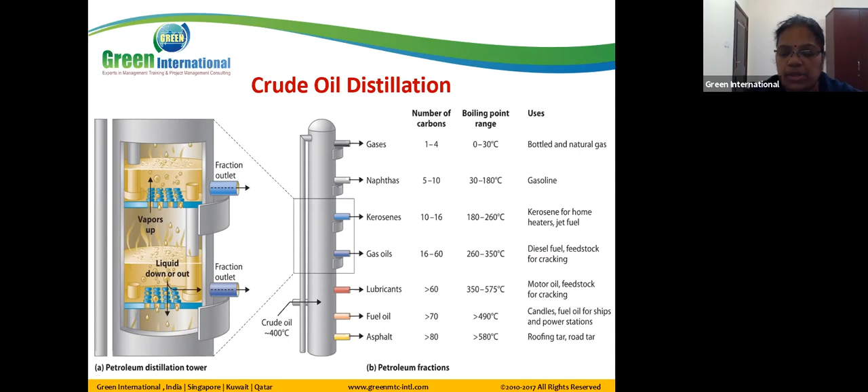We generally have a plate here, and it depends upon the crude oil, generally 400 degrees. The lighter one should be on top, then slowly the heavier one will be in the bottom. This is called - heavier one gases, normally until the 30 degree boiling point, until C4 it will be there. Naphthas, kerosene, gas oil, lubricant, fuel oil, and asphalt.

So just to show some picture - I don't know whether you all have got this material, I don't know whether you got it or not. Yes, we have received it.

Yeah, the total flow, I mean flow diagram for distillation. First you have atmospheric distillation with the crude oil. Then the heavier, that's called the lower end product, again they go with vacuum distillation here. Let me zoom - I don't know, I cannot see here.

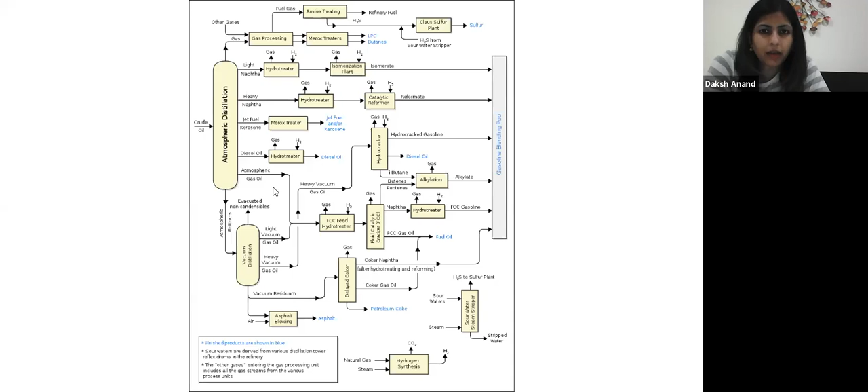Is this given separately, ma'am? That's what I'm not really sure whether you have got it or not. Can you check later and let me know, then I will send it to you all.

Okay, so there are two types of distillation generally, because the first slide I showed you is the overall process flow, but this is in detail - even this is also not much covered, I would say. Atmospheric distillation, then we say the bottom, then go to vacuum distillation. From the vacuum distillation only you will get the asphalt, and then you have a residuum first of all. That vacuum residuum - here it is atmospheric bottom or atmospheric residuum.

Then you have multiple processes - you can have a hydrotreater. What does this hydrotreater mean? Then catalytic reformer - I think we will talk about catalytic reformer later on, that will convert from a low octane number to a high octane number, that's called reformate. And then removing sulfur, that's called a sweetening process, we will talk about that when you review the question and answer.

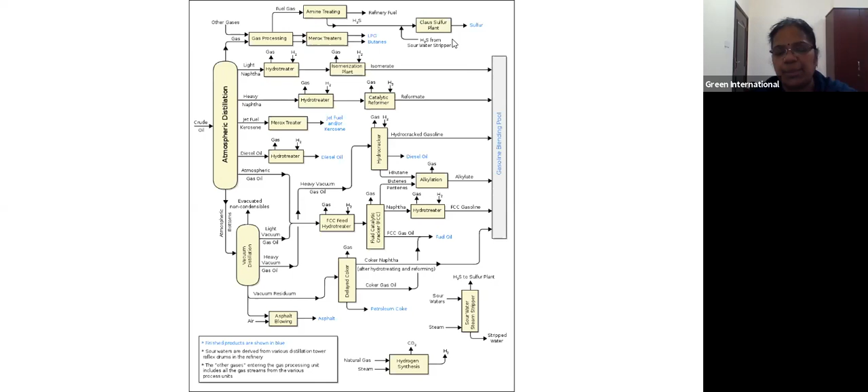We'll talk about it - I have a lot of questions in distillation. Very rarely you will get a problematic question, even that is related to mass balance, and some you may have boil-up ratio calculations and all. Most likely you will get a theoretical question in refineries, I mean in distillation. So this picture just gives you the overall idea of what the processes are.

So now let's go back to our slide.

So generally you have a distillation tower, whether it is atmospheric or vacuum distillation. Normally you have a feed. Then on the upper portion, it's called a rectification section, and the bottom one is a stripping section.

Anybody working in the refineries? Abhijit, Anthony, Vioran? I have worked in the gas plant. Yeah, I worked in refineries initially. So you might have known better than me then. So if you have any more material, maybe please share it with others, maybe that will help them.

Okay, so this is what rectification and stripping means. Then you have a condenser, whatever contents will be collected in a reflux drum. Then the reflux again will be fed back to the distillation, and the distillate, generally called a gas form, will exit. In the stripping section you have a reboiler, and whatever the boil-up is, it will go up. The liquid will be fed from the top to the stripping section. Then from the boil-up we'll have a vapor again. This is called the bottom product.

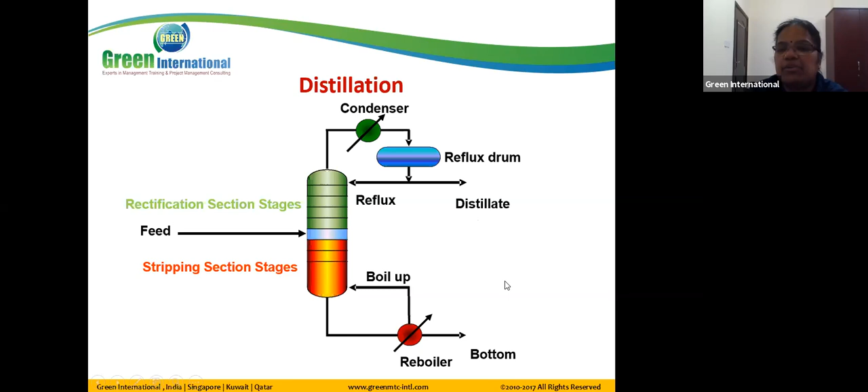So in the rectification section, overhead, that is V, which is nothing but L plus D, whatever is coming here. So again you take a balance in the rectification section alone, then you get XV in the V-bar, that is equal to XL in the liquid plus XD in the distillate.

So reflux ratio, R, is nothing but L by D. L by D is called the reflux ratio. So if you divide by D, V-bar by D equals L by D, and here it is XD only, so L by D becomes the reflux ratio. So the same XV you can write in reflux ratio form.

So if you can remember, if they give you the mole concentration in vapor in a rectification section, then you know this formula, you can use it. If you know the mole fraction of liquid and mole fraction of distillate, you can use this reflux ratio formula to calculate the V-bar. From V-bar, you can even calculate the boil up also.

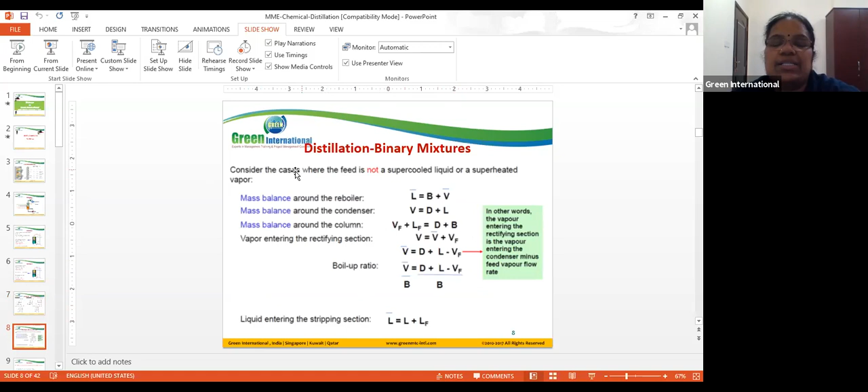So when you substitute those things, consider the cases where the feed is not super cooled or superheated. Then you can get the balance around the reboiler, around the condenser, and around the column. If you have 3 mass balances, then you can find the vapor entering the rectification section, then substitute that value.

You will get the boil up ratio, which is nothing but D, the distillate mole, plus the liquid that's in the condenser section, right? Boil up here, boil up means in the bottom.

Here the L, D, which is the liquid coming to the stripping section, minus your VF. VF is nothing but, whatever vapor is coming from the feed, some percentage is getting vaporized, that is called VF. So the same way, if you know D, L and VF, you can calculate the boil up ratio.

So this is another thing, you don't need to remember everything. Just remember this boil-up ratio, there is a formula V by B, boil-up ratio V by B. Also you can calculate, if it is not a super cooled or superheated liquid, from this formula.

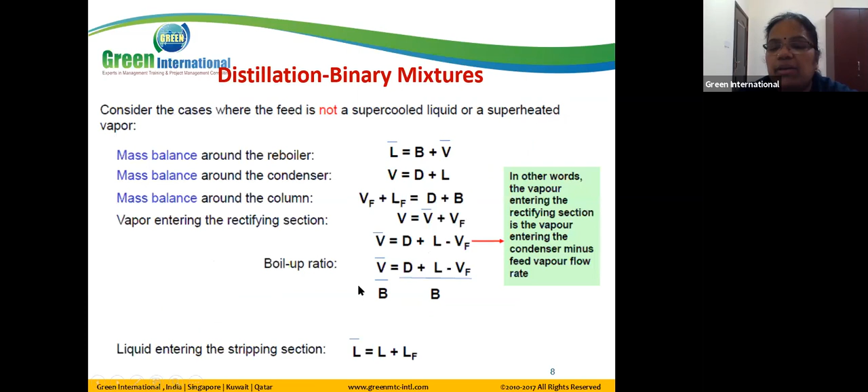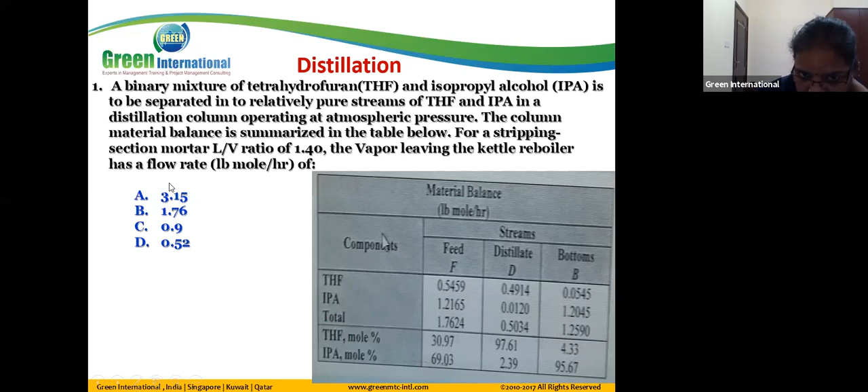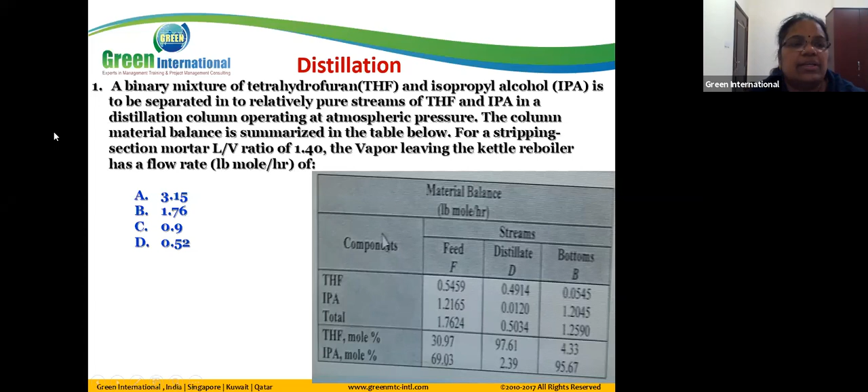They have summarized, for the stripping section, the L by V ratio given. They are asking you to calculate the vapor leaving the kettle, the flow rate in lb mole per hour. Let's go back to the chart. If you remember this chart, it is here, right? This is the stripping section.

They have given the L by V ratio, not the boil up. What is the question? It's the vapor leaving the reboiler, meaning V bar is what they've asked, V bar, V. The L by V is given, the V being the vapor leaving the reboiler.

Okay, so now let's see what information is given. They have given the feed and the distillate and the bottom. Total flow rate is in LB mole per hour, which is also the question. LB mole per hour is given, mole percentage is also given. How to calculate L by V? It is given.

L by V ratio is given as 1.4. Then L is nothing but 1.4 into V. Right? Any idea?

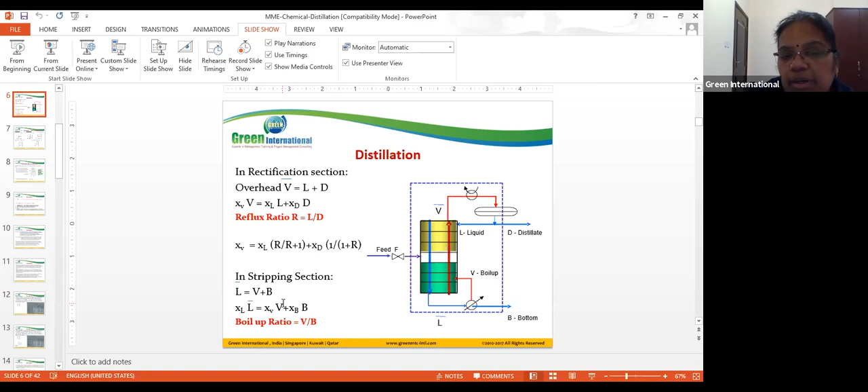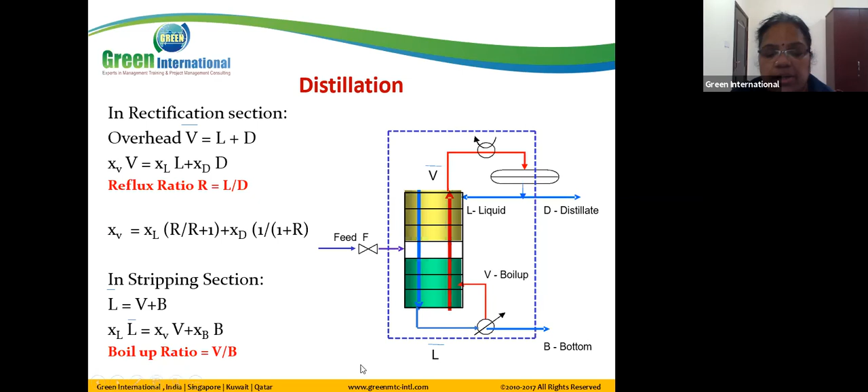V by B, we can take it as, where it is, the boil-up ratio you have to calculate. L bar equals V plus B. Then if you substitute here, I think you will get it. So if you divide it by B everywhere, you will get it. Let's see how it is being solved.

Answer is A, okay, they have given. So this is the mass balance. At bubble point, L bar equals F plus L. That we saw, V equals V bar. So at L equal to 0, why is it L equal to 0? They have only taken into consideration ammonia only, right? So to recover the majority of ammonia, that's why they take it as L equal to 0. Then it is XF in the feed.

So F by B, V by B plus XB here. Then for ammonia, what is the balance? For water, what is the balance? Then they have solved that. They take it as V by B equals 0.71. So here you substitute one into another equation. So here, what is F by B? That is 0.95 V by B plus 0.01, right? You substitute that in any one of the equations, then you will get the value.

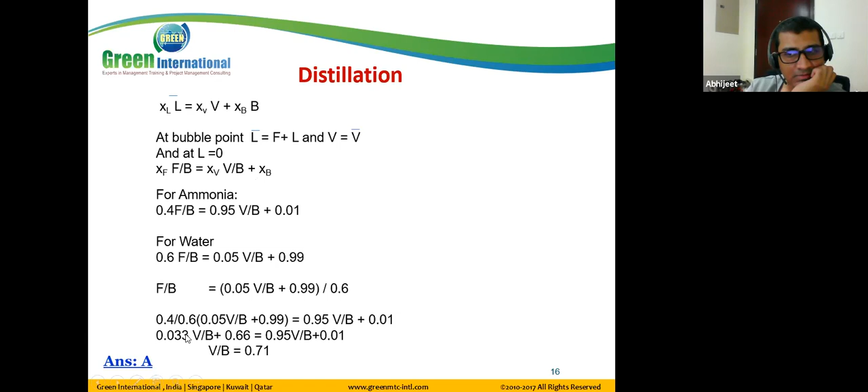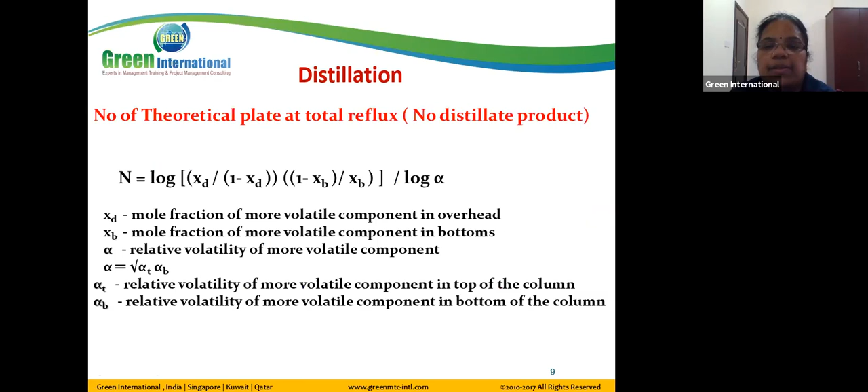Why is L is 0? I didn't understand. See here, yeah, they are talking about substituting L bar equals F plus L. That means if you see here, bubble point, you have considered L is already there. This is only in the stripping section, and already we consider F plus L, that's L bar. So that's what here we have talked about, L bar, which is already in the feed actually. That's the point of bubble point we talk about.

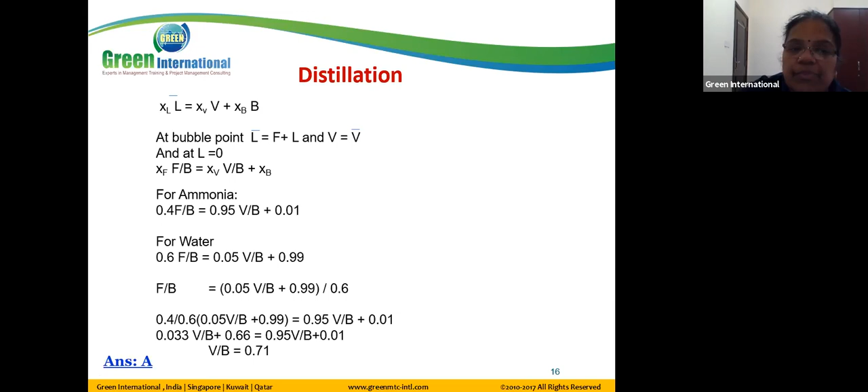So in the bubble point, L bar equals F plus L, and V equals V bar. You substitute here, and L equal to 0 means that is nothing but your pure liquid you are considering, that's everything in feed plus vapor. So substituting that bubble point condition in your mass balance, you arrive at your boil-up ratio.

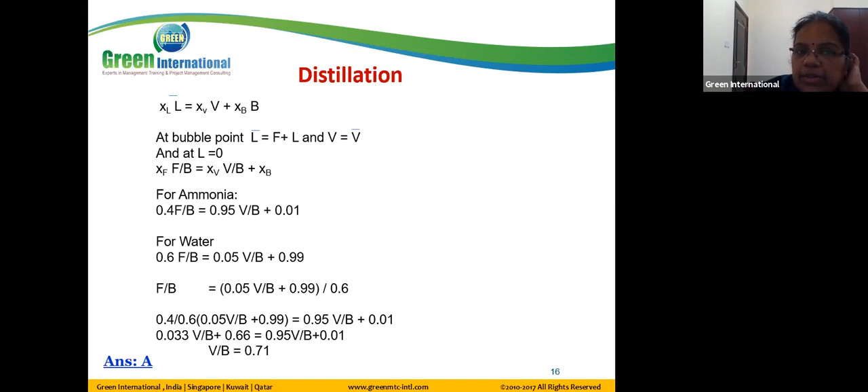So next question, this is all we talk about. From now onwards it's going to be more theoretical. Bottom product of atmospheric pressure crude oil distillation column is termed as Asphalt or Reduced crude. Reduced crude is the right answer. Asphalt will be the bottom product in vacuum distillation. First you have atmospheric distillation, then vacuum distillation. So asphalt will be the bottom product of vacuum distillation. Here they're talking about atmospheric distillation, so it's called reduced crude.

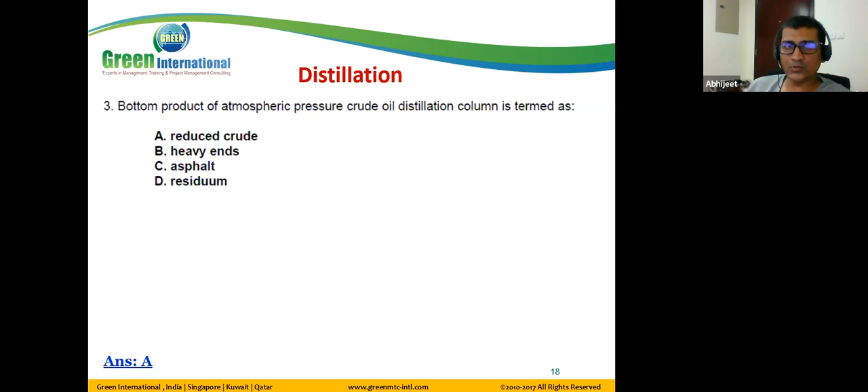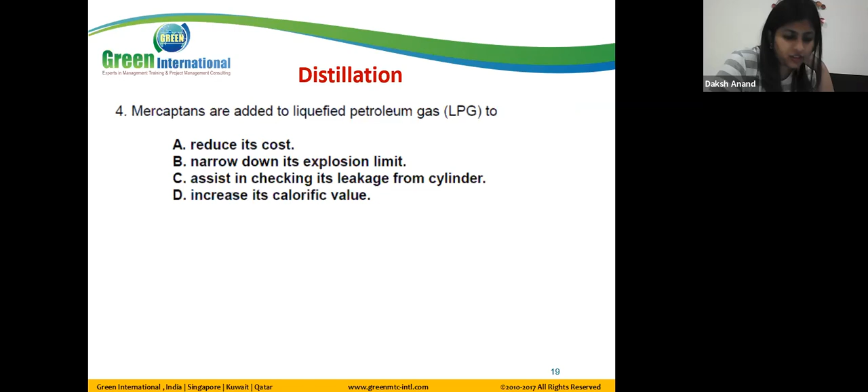Mercaptans are added to LPG - this is a very common question also being asked. Why are we adding mercaptans? To check the leak - assist in checking the leak. Very simple.

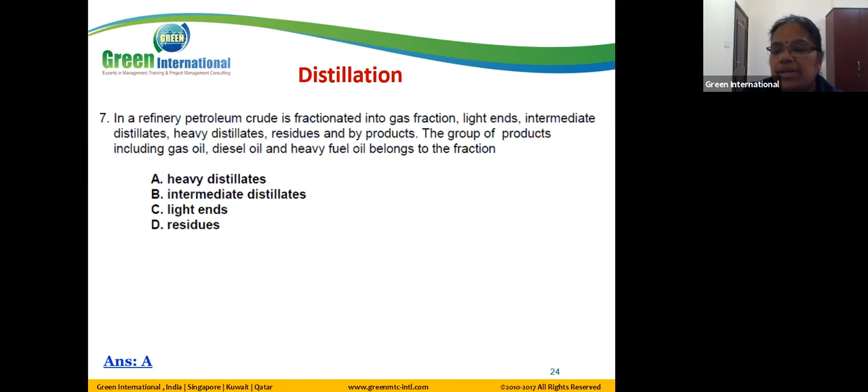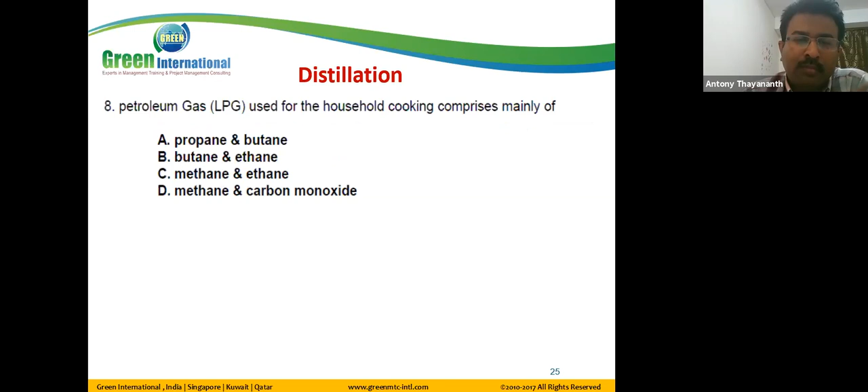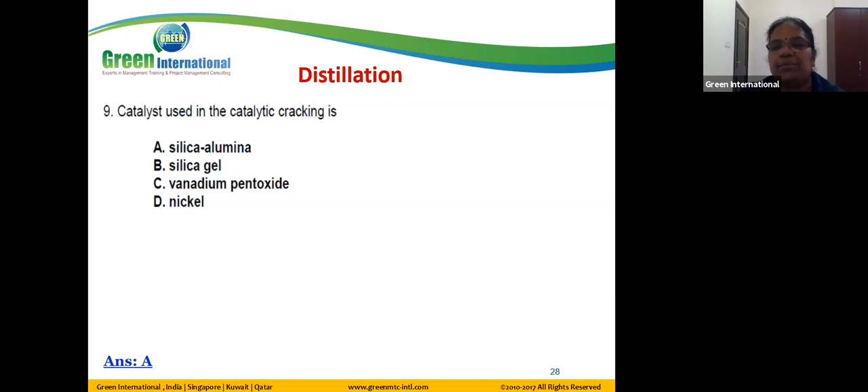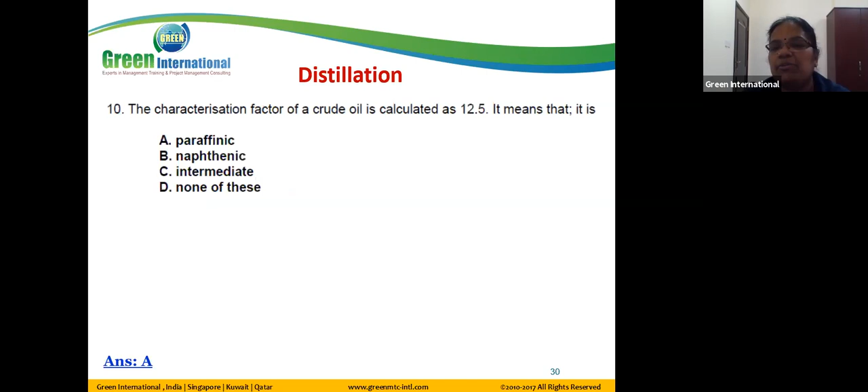The characterization factor of a crude oil is calculated as 12.5. It means that it is paraffinic. Very common question - they'll give us some K factor, then what is the characteristic of that crude oil?

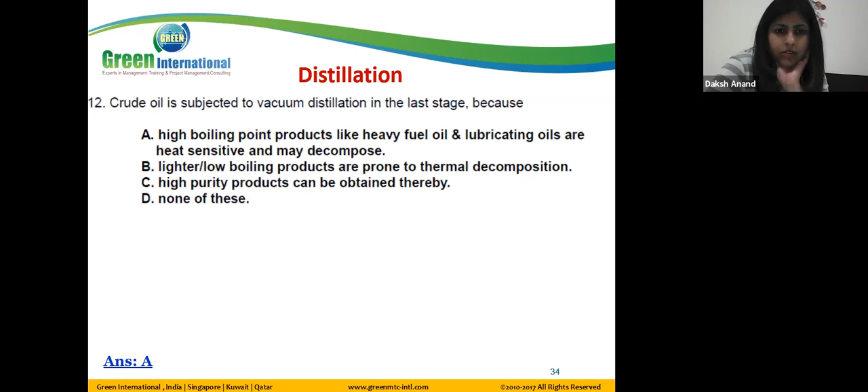Crude oil is subjected to vacuum distillation in the last stage because... why is there vacuum distillation? None of the above - none of this, none of the above. Is it true? High boiling points. High boiling point - heavy fuel oil, lubricating oil, they are heat sensitive, they may decompose at atmospheric pressure. That's why we use vacuum distillation to distill it further. Decrease the boiling - that is the reason why there is vacuum distillation we use, because we want to distillate the further heavier hydrocarbons. That is why.

Which of the following has the highest octane number? Aromatics - this is also very common.

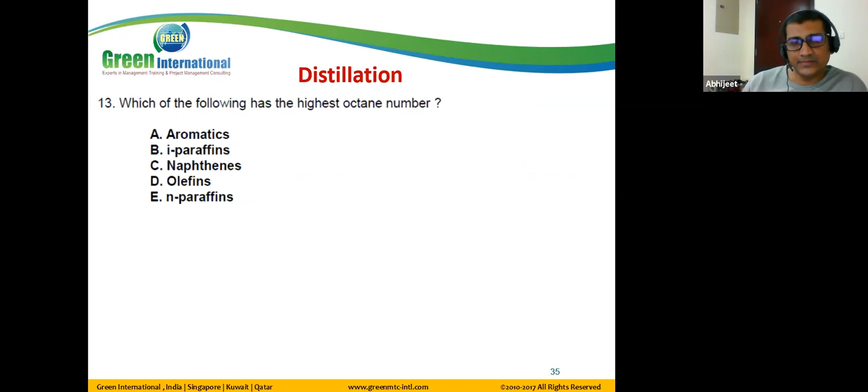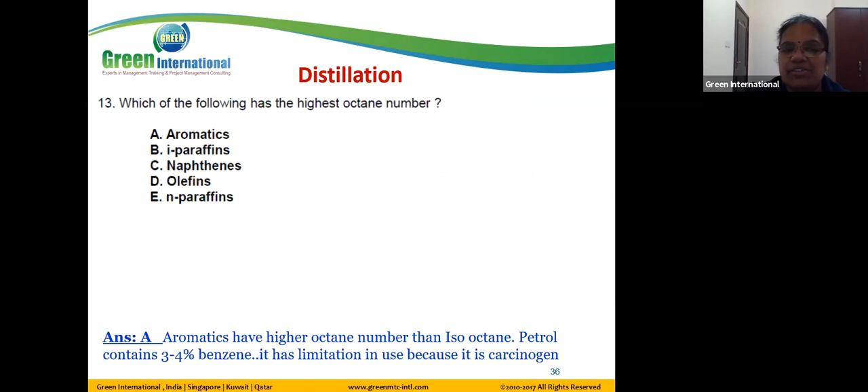Aromatics is the right answer. People will simply say octane or paraffin or something, but aromatics has the highest octane number. Petrol contains 3 to 4% benzene, that's aromatic, right? Because of the carcinogen limitation, it cannot be used, but octane number-wise, chemistry-wise, they are the highest octane number.

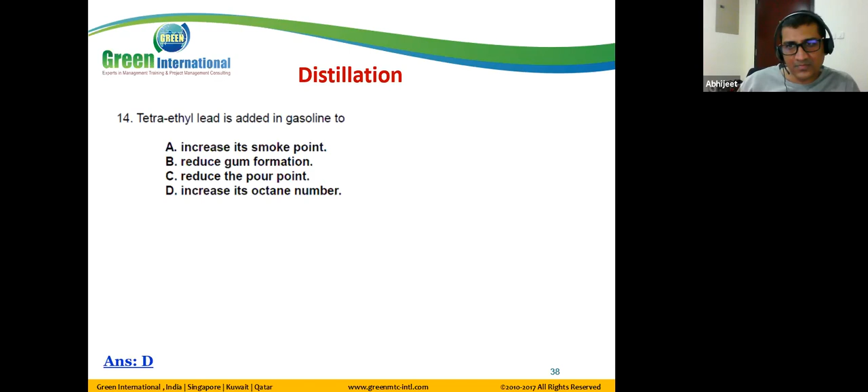We talked about catalytic reforming. In that process, they are using TEL.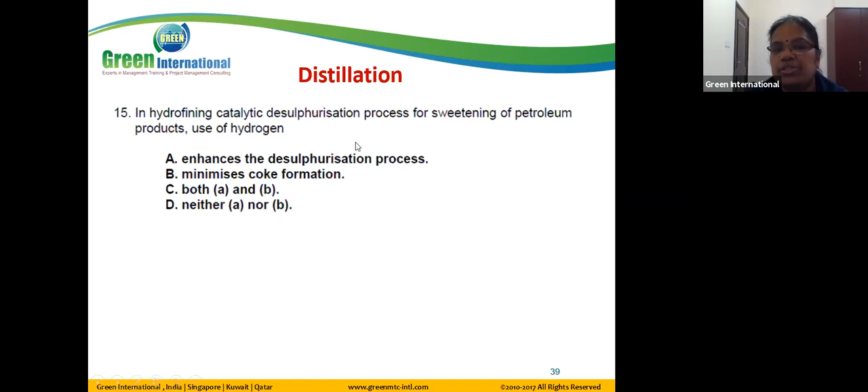Hydrofining catalytic desulfurization process for sweetening of petroleum product uses hydrogen. Both A and B, what is the answer? Enhance the desulfurization and minimize the coke formation, so the answer is C. Whenever you see A and B, you take it. But here also, as he said, the desulfurization process will enhance, and coke formation also. So if you want to minimize the coke formation in the petroleum refinery process, hydrogen will be used in desulfurization, both.

Doctor solution, sweetening process, just now we saw, right? What is sweetening process? Remove the sulfur. Yeah, remove sulfur, and then minimize the coke formation. So in the doctor solution, we are adding it in the sweetening process. What is the doctor solution? Sodium plumbite. Sodium plumbite, correct. Very good.

That's all about what I have here, but more process-related theoretical questions - the problematic ones related to mass balance, that's all I have there. Mostly if there is some problematic question, whatever is given, that will become a theoretical question, maybe they can change many things. I have some refinery, petroleum refinery theoretical questions, I think 5 sets of questions, each set having 30 or 40 questions. Just go through that, I have prepared from some other material. There may be some answers right or wrong, but I'd say the first two papers you have are mostly all right. Anyhow, when you go through the process itself, you will understand what is sweetening - just now we saw what is sweetening, in the sweetening what solution we are using, what is catalytic reforming, what is being added in the catalytic reforming. Same way, you can understand the whole process when you see the multiple questions.

So that's what about distillation. Now we go back to fluid mechanics, that's also a small topic. Here we are going to talk about pump, pipe, pump, flow rate.

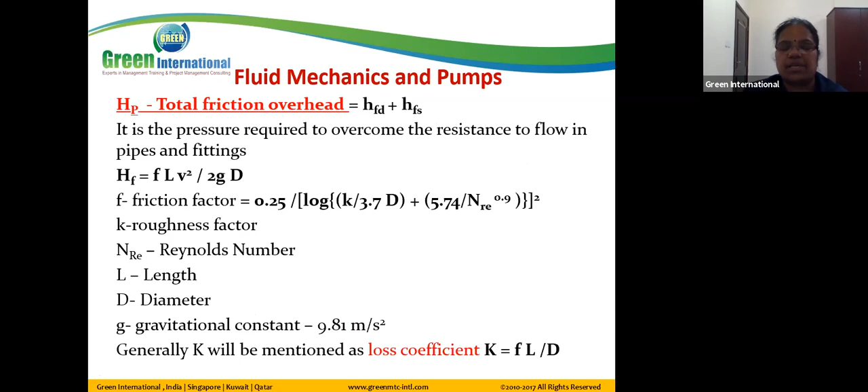Now, a very common question is to calculate the pump output or power required. There's one more formula: HP, the horsepower required by the pump. Power output, W, equals the total head times flow rate times the density of the liquid. Also, power output divided by the percentage efficiency gives you how much power is required by the pump. H is the total dynamic head, with flow rate, density of fluid, and specific gravity. To convert to kilowatts versus HP, if you use HP, you need H in feet and Q in gallons per minute for that formula.

Now there's another concept called NPSH, net positive suction head. Whenever the pressure in the liquid drops below the vapor pressure, you may hear that you should maintain some pressure in the pump to avoid cavitation. That is called NPSH. Whenever the pressure in the liquid drops below the vapor pressure corresponding to a particular temperature, the liquid will vaporize in the pump, which will collapse the pump. That's called cavitation. To avoid cavitation, the pump should be maintained at the NPSH required, so normally it should be less than or equal to whatever calculated NPSH value is available. First you calculate, then you maintain something higher than this value.

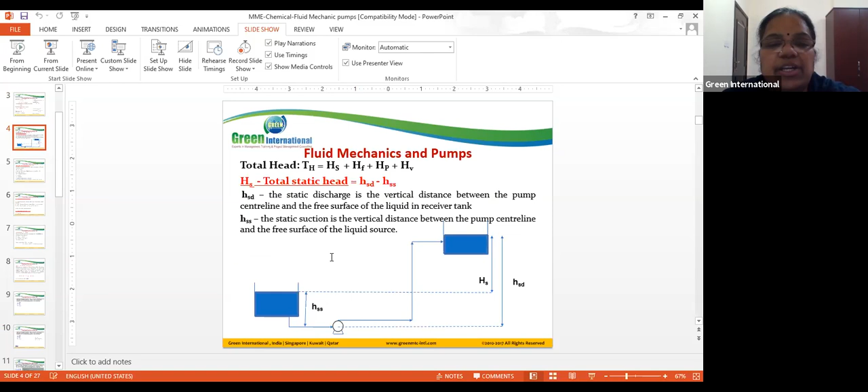If you see, the formula is right, rho GH. So 1.7 is the unit. That's rho G, and specific gravity is nothing but liquid into 1000. That means 1700, you have to take 1700 as the density of that particular fluid. So 1700 into the meter, how many meters is it? 6 meters.

1700 into 6 into 9.81. What is the value? 1700 multiply by 9.81 multiply by 6, into 0.00981. So...

Actually, density, specific gravity, is the conversion correct? What I told you, is it correct? 1 kg per meter squared is 0.00981 kilopascal, this is what I'm saying here. I don't know, there are a lot of, some people say 1 kg per centimeter squared equals 98 kilopascal. Check the conversion, whether it is correct or not.

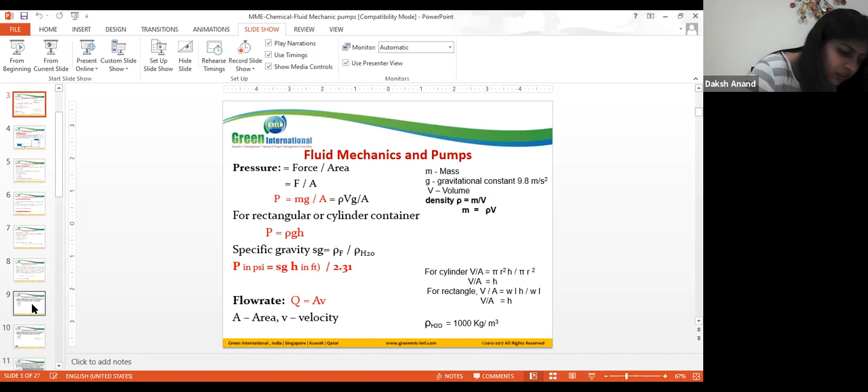It is correct, 0.00981. Maybe here it is missing out a 9, one decimal is missing out. I don't know, if it is right, there should be some decimal problem in the answer. Here also in meter, that is also in meter per second squared.

Can you check later on and let me know whether it is the correct answer or not?

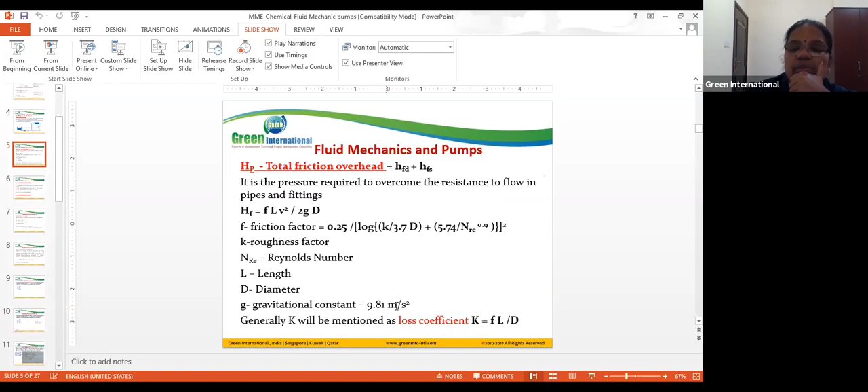The unit for gravitational constant is 9.81 meter per second squared, right? Where are we? We are in fluid mechanics. If you see here, the gravitational constant is 9.81 meter per second square, that's the unit. So when you substitute here, rho is kg per meter cube, g is meter per second square, h is meter.

So what will you get? Kg per meter second square, isn't it? Am I right? Kg per meter second square. So 1 kg per meter second squared equals 1 Pascal. Okay, kg per meter second squared equals 1 Pascal.

So now it is something around 100, isn't it? So whatever value you are getting is 100,062, right?

Now if we take the question, if we do 1700 multiply by 6 multiply by 9.81, what is your value? 1700 is the density of the fluid, multiplied by the gravitational constant 9.81, multiplied by the height which is 6 meter. What is your value? 100,062.

So then that is Pascal, so when you convert into kilopascal, it is 100 kilopascal. So which is what? 99.6. Clear? So the answer is correct.

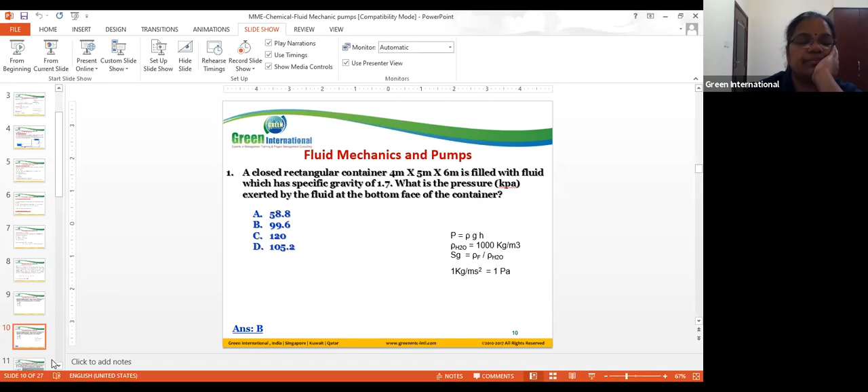So what we are getting by multiplying rho, g, h, we are getting in kg per meter second squared. That is nothing but 1 pascal. So then convert it into kilopascal. So now the answer is B. That is correct.

Let's go to the next question. This is a very repeatable question, very often this question is being asked.

Three tanks A, B, C at different elevations are interconnected as shown in the figure. The levels in the tanks are shown as the level in a piezometric tube. The flow quantities are also indicated. Under the above condition, the flows Q1, Q2, Q3 are related by?

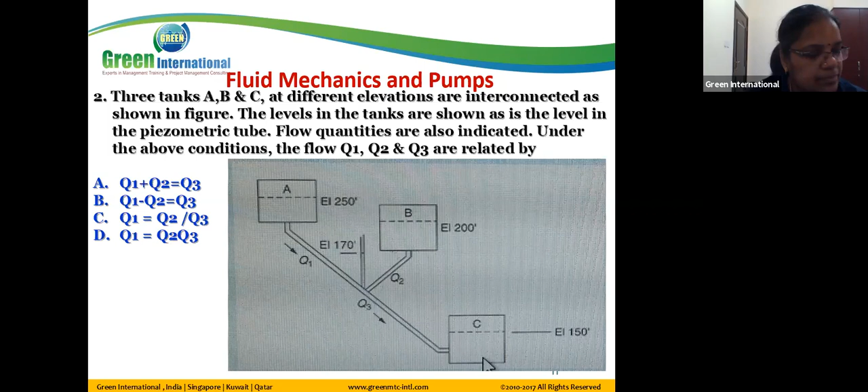Why? What is the answer? Nobody is telling anything. Q1 plus Q2 is equal to Q3. Any more?

Is it right, everything? Shipra, Abjit? No idea? You both are on mute, so I couldn't hear you. See, Q1 plus Q2 equal to Q3, that is right.

But by reading this figure, you have to understand. See, the level of the tank is at 250, the pressure here is 200, right? But if you see at this point, the pressure is 170, which is less than 200. So the flow will be from B to this direction.

So that's why Q2 will be added to Q1. Here it is high pressure, here is also high pressure, but at this point the pressure is low. So you don't just look at the flow chart or the slope of the pipe, you have to read by the piezometric pressure. So because this 170 is less than this 200, it becomes Q1 plus Q2.

If it is higher than 200 but less than 250, then the sum of Q1 will go to Q2. So read that flow diagram correctly. Answer is A.

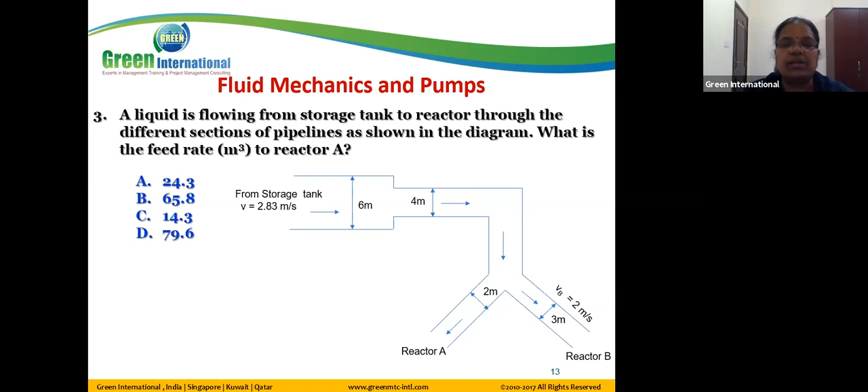This is also, they have given some diagram, then they ask you to calculate. The liquid is flowing from a storage tank reactor through different sections of pipeline as shown in the flow diagram. What is the feed rate in meter cube to reactor A? See, there is a storage tank.

From the tank it is coming, then some is going to reactor A, some going to reactor B. So they are asking you to calculate the reactor A feed rate in meter cube. So how to calculate?

First, if you calculate the total flow rate coming here, that is equal to the flow rate going to reactor A plus flow rate going to reactor B, right? How to calculate the flow rate here?

Velocity into height? Or that's a volumetric flow rate into area? Area, correct, velocity into area. So here, what is your area?

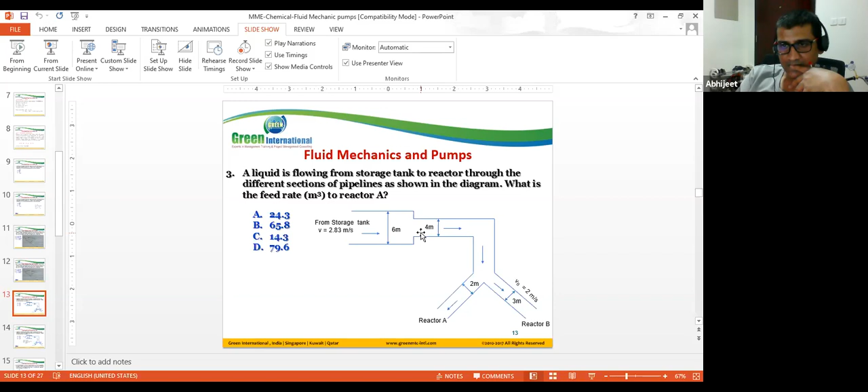For the pipe, pi into 3 square, cross section area, okay? Yes, cross section area only, it is pi r square. So then calculate the volumetric flow rate here. What is the area?

Then you can calculate the volume here, right? In reactor B, what is the volume? They have given velocity, they have given diameter.

So, calculate the total flow rate entering here and then calculate the total flow rate for reactor B. Then if you minus it off, you will get the feed rate going to reactor A.

So here, what is the value? Whether you have to take 4 meter or 6 meter, because that's a dia, right? Whether you have to take 4 meter or 6 meter? 4 meters? No, you have to take 6 meter.

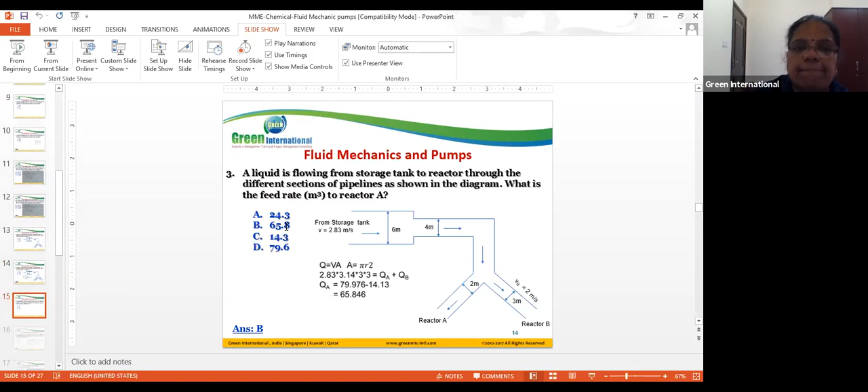Okay, if a pump handles fluid at temperature of 177 degrees and a pressure of 164 psig with 3.66 meter per second at the suction nozzle, what is the NPSH available if the vapor pressure of fluid is 134 psia? Specific gravity is given, 177 degrees centigrade, specific gravity of the fluid is given. Vapor pressure of the fluid is given. Then fluid temperature and pressure is given, velocity is given.

So what is the formula for NPSH available? You can see this one, right? NPSH available, vapor pressure is given, velocity is given. HVS, how to calculate, V squared by 2G, isn't it? V squared by 2G will get the velocity head.

Friction you can ignore. HPS and HSS we know. But convert everything into the same unit. That's a key thing also again, whether it is given in the same unit. Do you want to write down the formula? Copy this formula: P is vapor pressure, suction static, pressure static, and friction static, and velocity static. Velocity pressure is nothing but V squared by 2G.

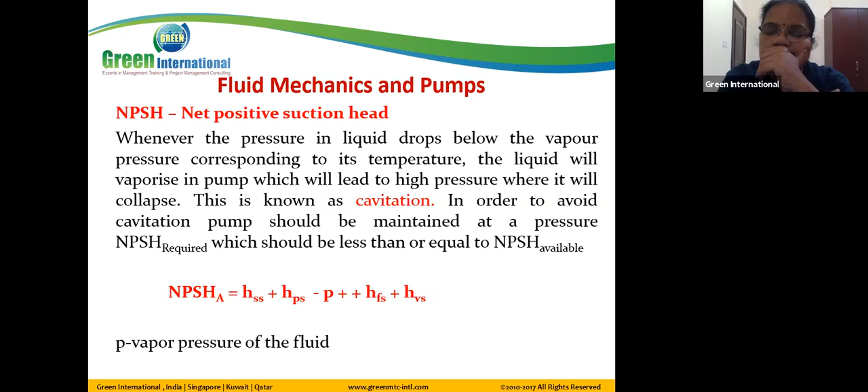NPSH calculation also very common. So what is the question here? If you see the question... So what are the things given?

Velocity is given, you can calculate HVS, V squared by 2G, right? Then vapor pressure is given, that's minus P, vapor pressure is minus P. See here it is in G, here it is in A. So convert everything into PSIA. So friction and friction vapor, friction velocity you can ignore.

Specific gravity is given, so how to calculate? P equal to rho GH. P we know, H we do not know. Then why is there specific gravity given?

So what is given? HSS and HFS are not given. So HS is nothing but minus P plus HVS. HVS is nothing but V squared by 2G. That means if it's not given, you can ignore it, right? HSS, suction static and friction static you can ignore. So suction head HS is nothing but H minus P plus HVS, and HVS is nothing but V squared by 2G.

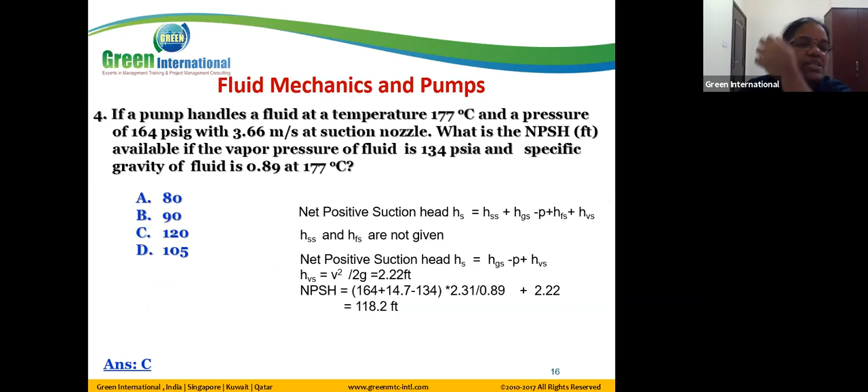Here we have to use everything - vapor pressure head, suction head, discharge head. Everything is in PSIG, you have to convert into feet. For that you use the specific gravity formula: P in PSI equals specific gravity into H divided by 2.31. Whenever you see pressure, this formula PSIG equals SGH divided by 2.31 is what you use.

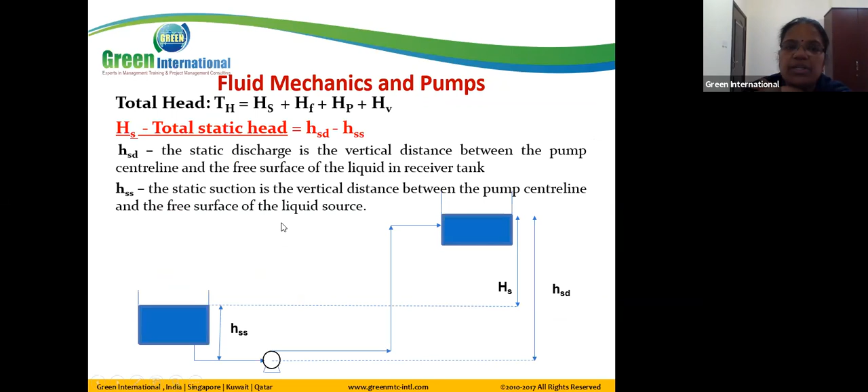This is what they have asked here - the total dynamic head, where pressure includes vapor pressure, vapor pressure head, velocity head V squared by 2G, and discharge pressure. The total dynamic head means the difference between suction and discharge. So on the suction side, what pressures do you have? You have that pressure and the vapor pressure.

The discharge pressure is 190 psig - convert that directly into feet, then calculate the total suction side pressure, then take the difference. So for the discharge pressure, 190 psig convert into feet - how do we calculate this? Just now I said P in PSIG equals specific gravity of the fluid into H divided by 2.31, so H you have to calculate.

Pressure we know - can you calculate the discharge side head? Don't go to the other parts yet, just tell me the discharge head first. The formula is P in PSIG equals SGH divided by 2.31. Specific gravity is given, H you have to calculate. Pressure is given as 190 PSIG - how much does H come to? 541.8 - that's the discharge head.

Now convert the vapor pressure also into PSIG. Velocity is given. It's 0 PSIG here, so that is nothing but 14.7 - that's our pressure. So total suction side pressure is 14.7 plus 14.7. Head available is 26 feet plus 10 feet. This is your vapor pressure, 14.7, convert that into feet. Friction is 0, operating pressure is 14.7 psig, convert that also into feet. So the suction side is whatever available plus 41.9 minus the vapor pressure.

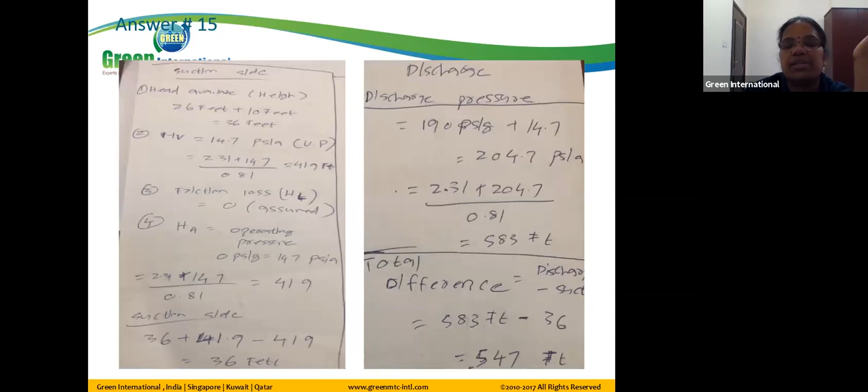Right, so that one also converts into PSIA, which is 14.7. That 14.7 PSIA, you also convert into feet. That is also 41.9 feet. So you have to take 36 plus your operating pressure, which is 41.9 minus the vapor pressure, that is also 41.9. So you'll get 36 feet, right?

So whatever in the discharge, 190 PSIG, that is in G, you have to convert into PSIA, 14.7, calculate that one, you will get in feet, 583 feet. So the difference, 583 minus the discharge suction 36, gives 547.

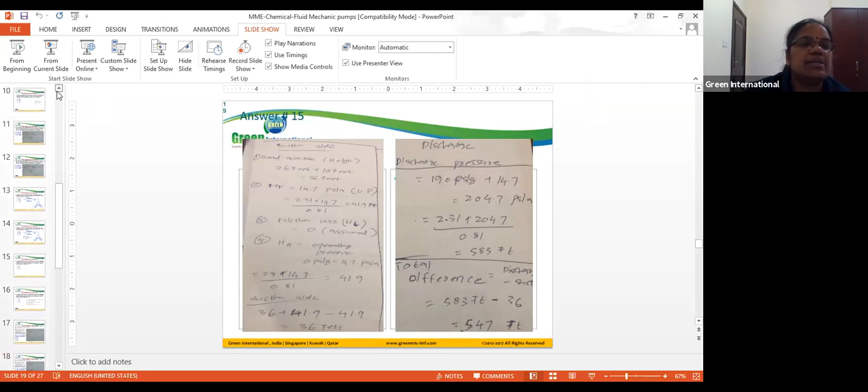Remember, when you use this 2.31 divided by 0.8, it's PSIA. I think I need to correct the slide also. Nobody has highlighted it. It's in PSIG, but in the question it is given, is it also PSIG only? Then why are they adding? I think it should be PSIA, I need to check. I think I just put PSI, so it has to be PSIA.

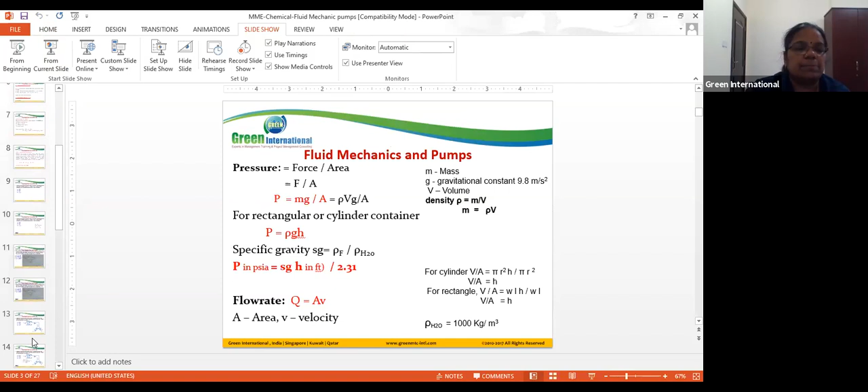So you understand how it is being calculated? First take the suction side from the height, 26 plus 10, right? That gives your suction side feet. You keep that as the suction side feet. Then convert the operating pressure into feet. 0 PSIG, convert into PSIA, 14.7 PSIA, that you convert into feet. Then the vapor pressure is already 14.7 PSIA, that you convert into feet. That is the total suction.

The discharge is 190 PSIG. That you convert into PSIA first, plus 14.7, then convert that one into feet. 190 plus 14.7, total PSIA, convert that into 2.31 divided by 0.81, gives 583. So the difference, 583 minus 36, gives you 547.

Most likely close to 523, that's the closest option, they are putting 523. For some people, they are getting the option as 532, I don't know what options they are giving. 500 plus 520, 530, you take that answer.

Understand this question very commonly, this question is being asked in fluid mechanics always, the calculation question. Whatever is given in the calculation question, if you understand it, even though the numbers change, you know how to solve it.

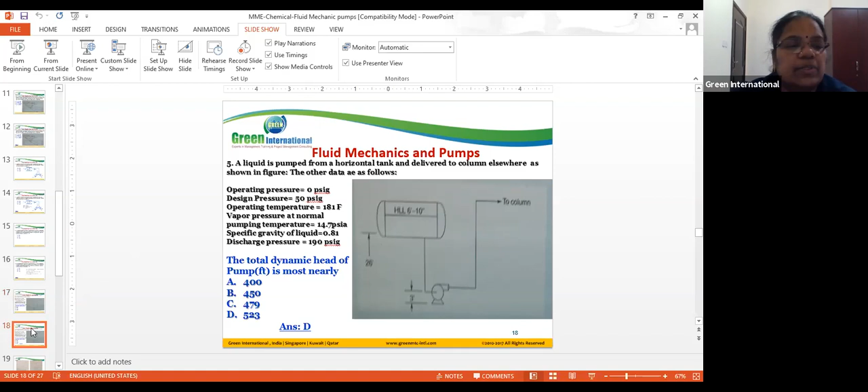Now this is something a little bit theoretical.

Okay, question number 6. What is the answer, can you read it? The discharge of a double acting reciprocating pump as compared to the single acting pump, which will be double? Flow output, flow output, simple. Single acting pump, double acting pump, the flow will be double.

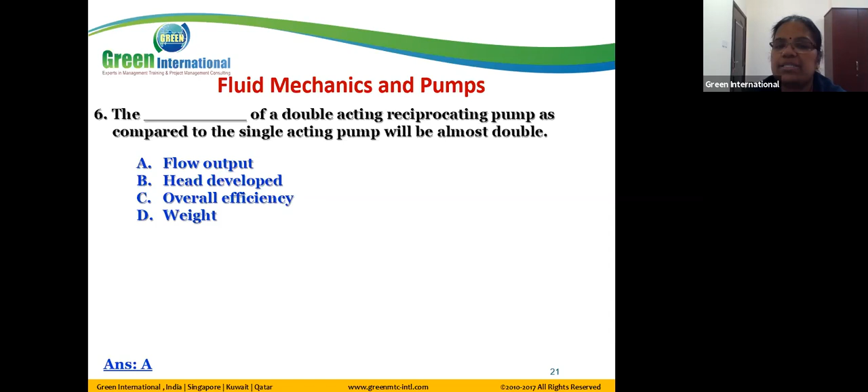Okay, this one you read it and tell me. Very interesting question, this is also sometimes getting repeated in the exam.

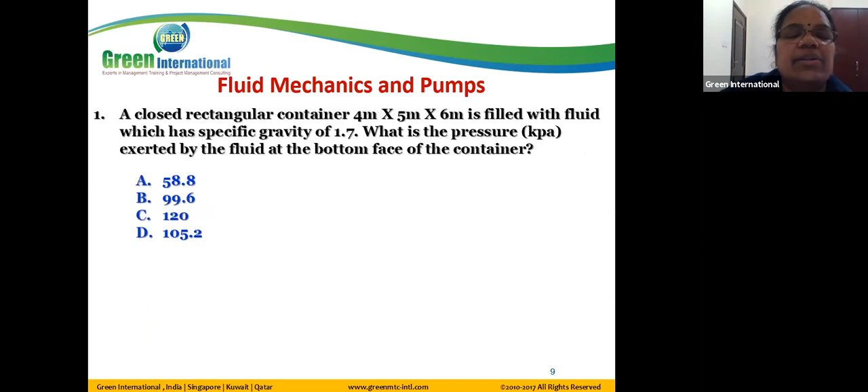So for power output you have to calculate HQ rho, but here HP, HQ SG. Take it as water because no different fluid is given, so SG becomes 1. HP you have to calculate, it is given in gallon. Q is given in gallon per minute and SG equal to 1. Use this formula to calculate. Then power output divided by the percentage of efficiency gives you total power required. So there are 2 things you have to use: HP formula, then convert that output by efficiency to get pump power.

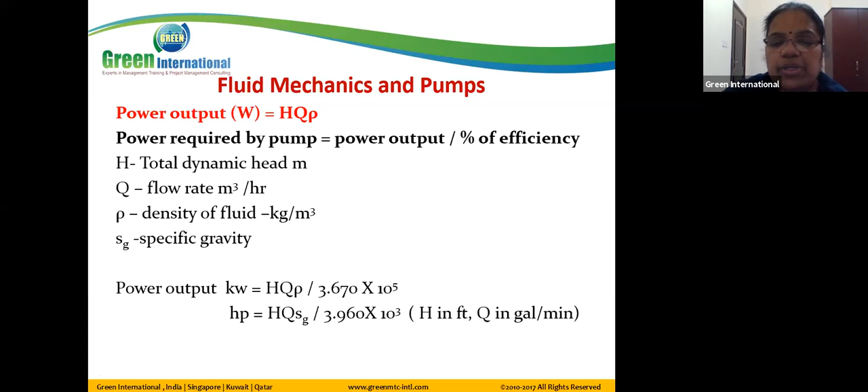HQ rho, the formula is there for power output. What is it? Just now I showed you, I asked you to note it down. First you have to calculate the power output, then use the efficiency. H you need in feet, Q in flow rate, SG becomes 1 assuming water. So you calculate HP first, then take efficiency from the chart, take H from the chart, Q also from the chart, then calculate the power output, then substitute here.

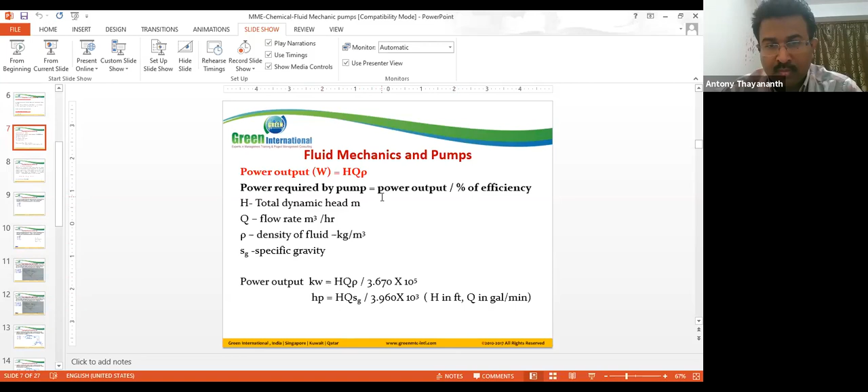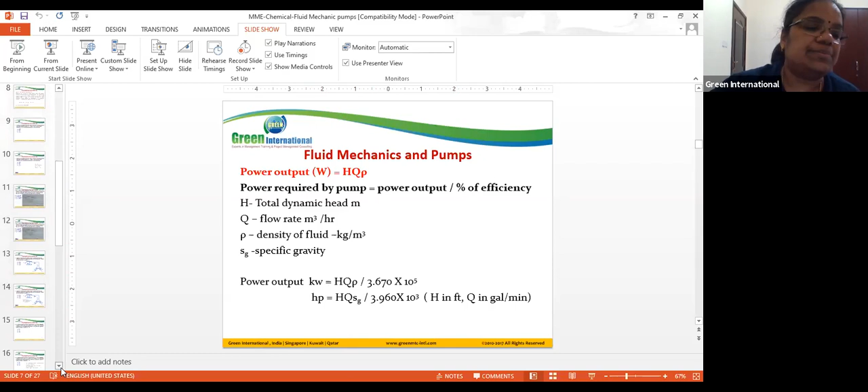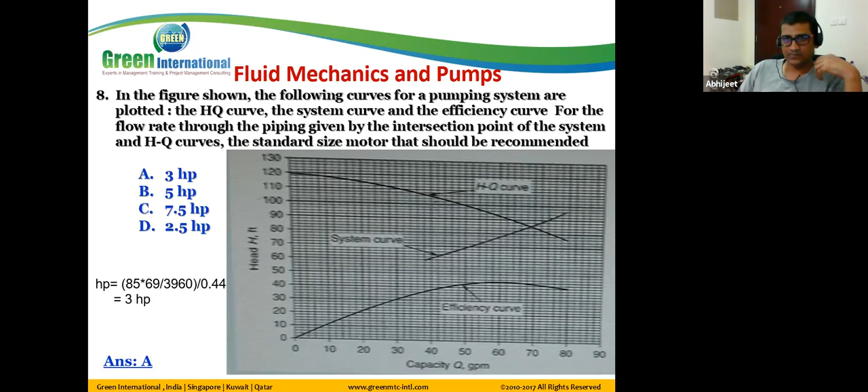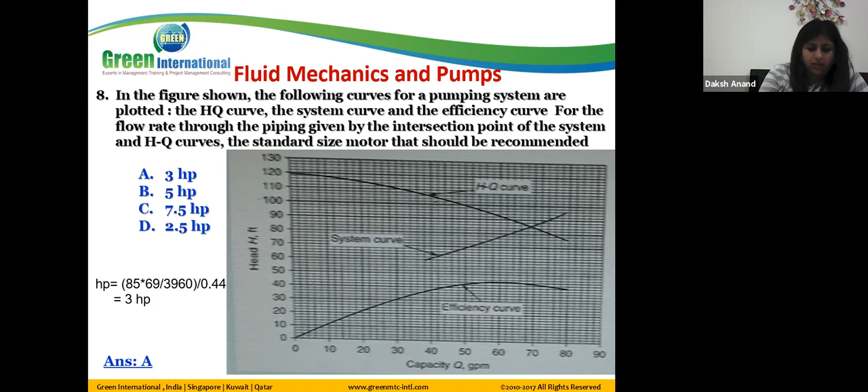Answer will be power output divided by the efficiency, so 3.5 means 5, 3 HP. Here they take the efficiency as 0.44 because it's 50, so each one is 2, so 0.44 is the efficiency and 69 is the gallon. 85 they have taken, so here also it's 44. So it becomes 85 into 69 divided by 3960, that's the key thing. Did you get anything? 3 HP, maybe 3 point something, 3.3. Actually with 0.42 it was coming 3.5, so with 0.44 it is 3 HP.

So a very common question is this chart, frequently coming, and this theoretical question about laminar turbulent flow is frequently coming too. And then NPSH, this one. So 3 important questions in calculation, I would say.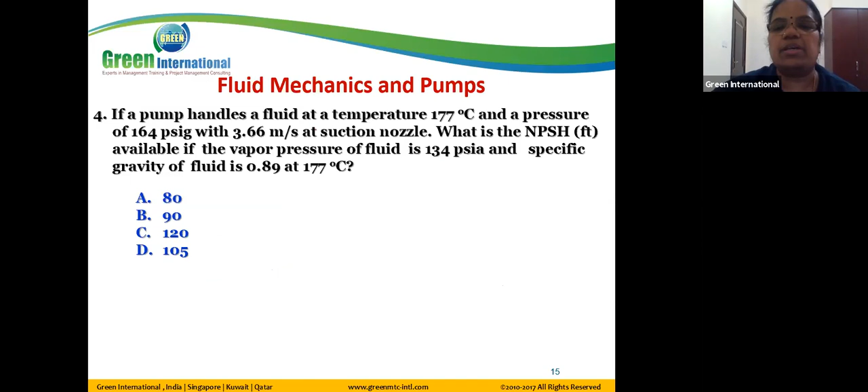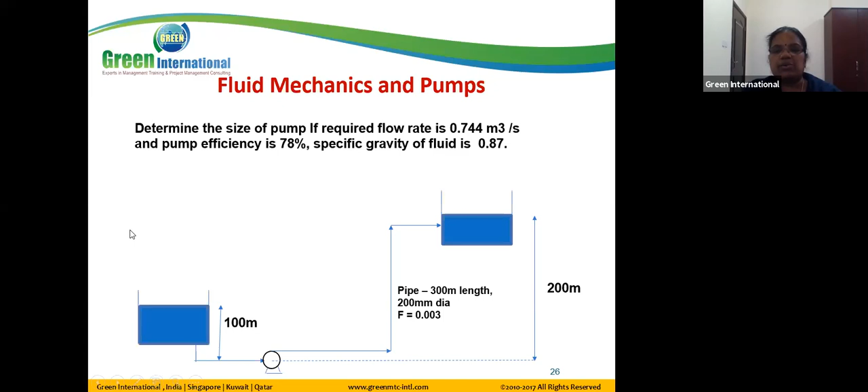Sometimes they may give the flow chart like this also, then they may ask you to calculate the total head. Whatever sample question we saw, they didn't ask you to calculate the total head by seeing this kind of diagram, with the flow friction head also given. Since there is no vapor, it's not a fluid, they assume it is water, there is no vapor pressure given, so you can ignore the vapor pressure head.

Very, very important topic, fluid mechanics - sure shot, 2 questions will be there. Distillation 2 or 3 questions you can see. Reaction kinetics 2 questions, so something around 7 to 8. Reaction kinetics, distillation, fluid mechanics.

Okay, so what we've covered so far - let's also see the fire extinguisher slides, just 5-6 slides showing different types of fire extinguishers and what kind of fire to use them for. What we completed so far: heat transfer, process calculation, reaction kinetics, fluid mechanics, distillation. The leftover is economic analysis, thermodynamics, and project management - 2 chapters plus project management. Next class we'll start project management, because without it I can't continue economic analysis.

This fire extinguisher and economic analysis content I recently added based on feedback from candidates. They said they got 2 questions from economic analysis, and 1 question on fire extinguishers.

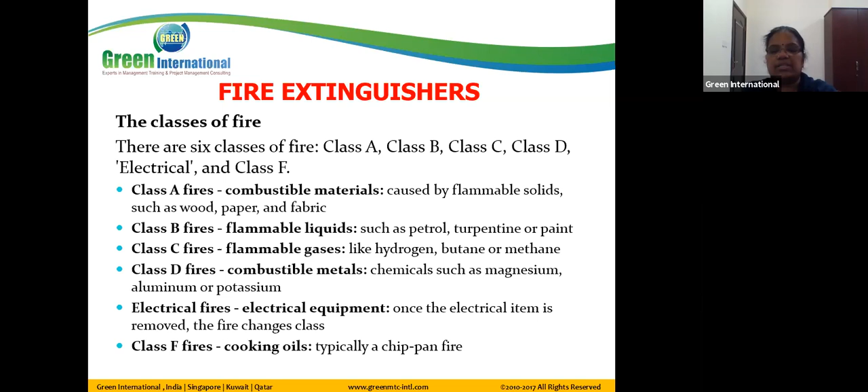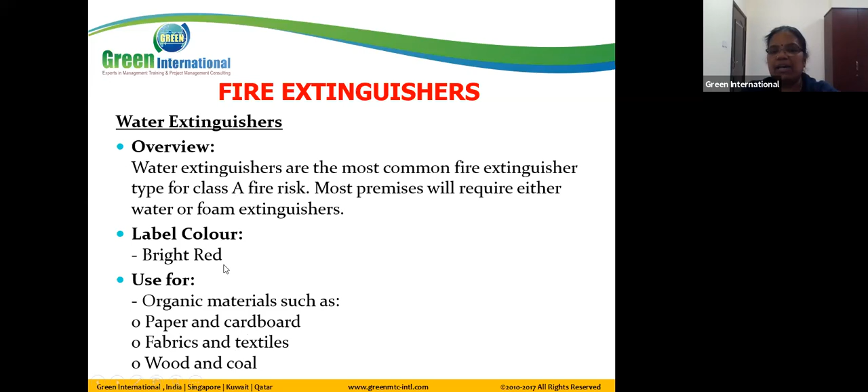There are 5 types of fire extinguisher: water, foam, dry powder, CO2, and wet chemical. Water is generally used for fire related to paper, cardboard, fabric, textile, wood, and coal. They may give scenarios - you have to read what type of fire it is, or what class: A, B, C, D, or what extinguisher should be used for that kind of fire. Generally water extinguisher is for class A, labeled red. Do not use it for electrical equipment, kitchen fire, or gas.

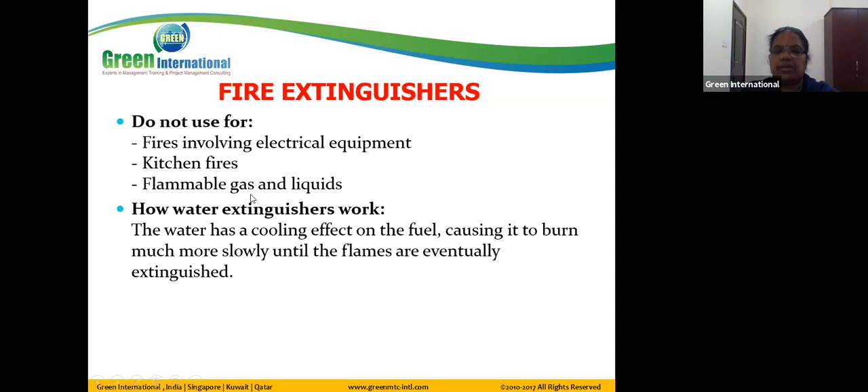Which premises use water or foam extinguishers? Office, school, hospitals, residential property, warehouse - all of these need either water or foam extinguishers.

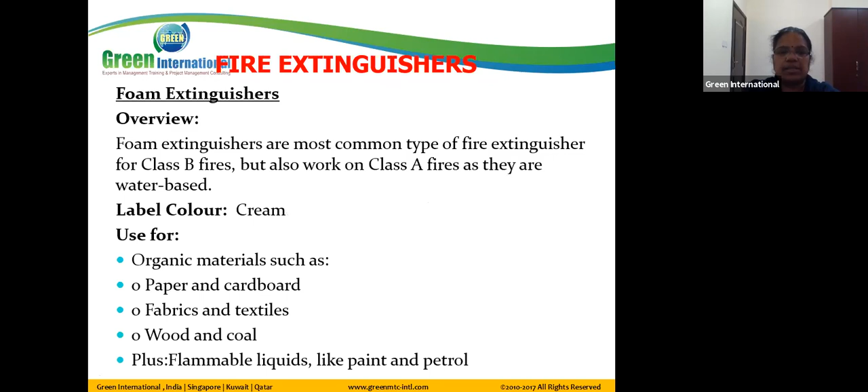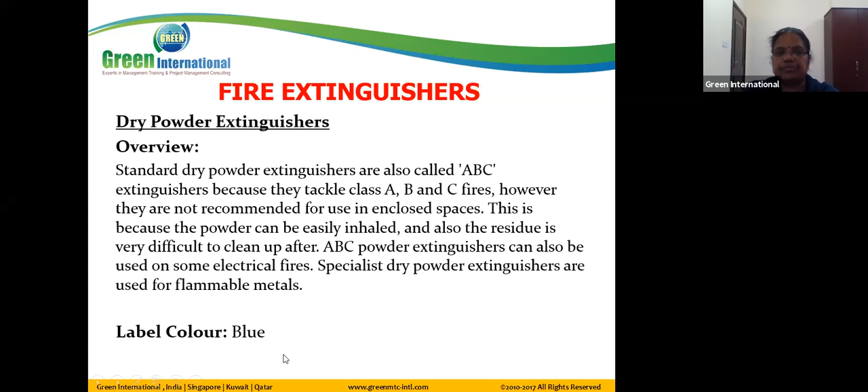Same way for dry powder - this is called the ABC extinguisher, it can handle ABC fires: paper, liquid, and electrical equipment (no metal). Class C is flammable gas, so ABC fires you can use it, color is blue. It covers flammable liquid and flammable gas also.

How it works is just for your information, but this is important. Generally if you know it will extinguish ABC fire, you can estimate roughly what kind of premises it can be used in. There's also a specialist dry powder extinguisher - this is something additional you can go through.

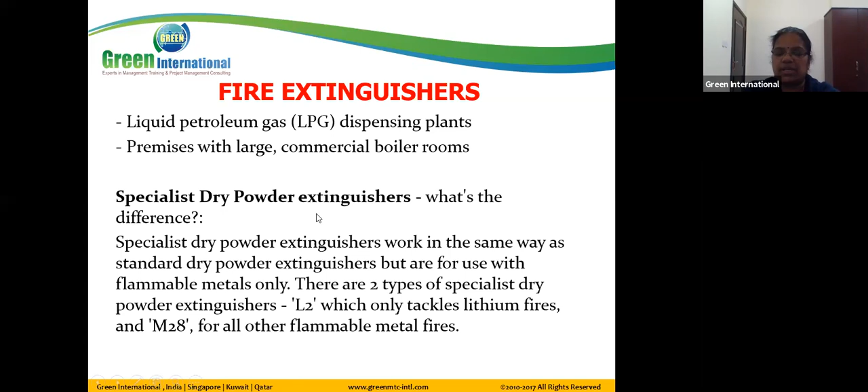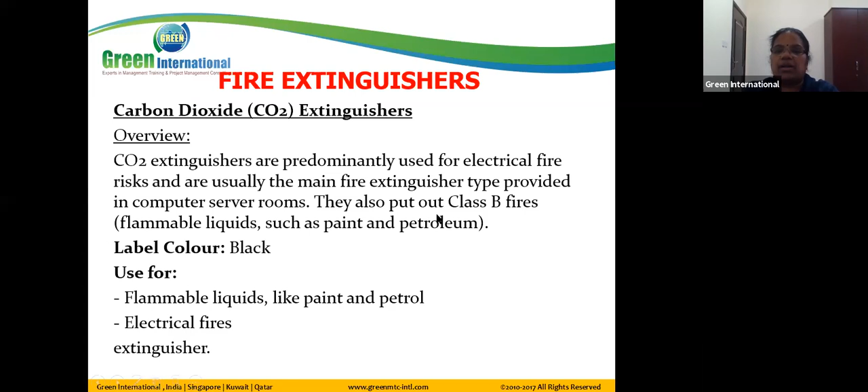The CO2 extinguisher - this is for flammable liquid, petrol, and electrical fires, generally for electrical fires, and also can be used for liquid and petroleum. Do not use it on kitchen, metal, or paper fires. Nowadays all vehicles have a 2 kg CO2 extinguisher in the car for this purpose, because of flammable gas.

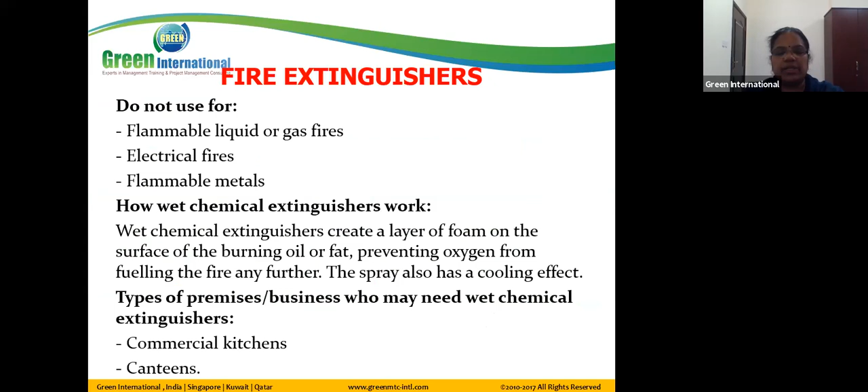Wet chemical is used for cooking oil and also paper and fabric. So that's all - just quickly remember the different types of fire extinguisher and what they're used for. I have some pictures also.

There are questions with different types of class fire - they put some scenario asking what class of fire it is, and then some extinguisher question for what kind of fire you can use, maybe choose 1 or 2 options that way.

So that's all - the leftover topics are thermodynamics, economic analysis, and project management, 3 topics in total. Prepare well. If any doubt, if no doubt, we can close for the day. Next class, if anything, you can go through whatever we discussed, the sums, calculations and everything. If any doubt we can discuss next class.